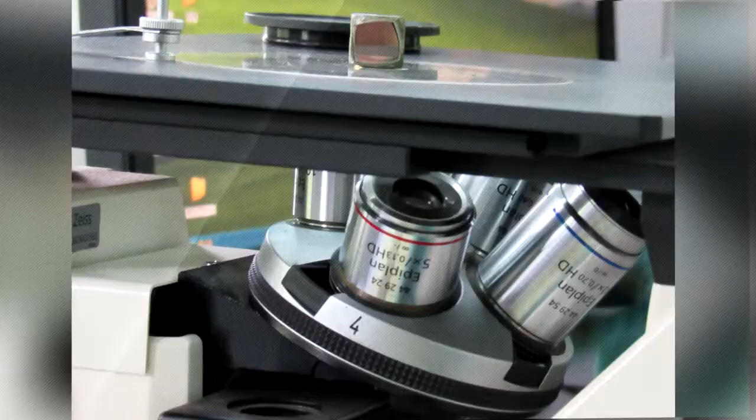Shengji, with its well-equipped R&D centers and national-level laboratories, carries out strategic cooperation with multiple universities and research institutes of Sinopec.

Shengji has 152 national patents granted and holds many API monogram licenses and ISO certifications.

Additionally, various other honorary titles such as National Key High-Tech Enterprise, AAA Grade Credit Enterprise, Contract Abiding and Trustworthy Enterprise have been awarded. Shengji products and services cover 7 sections.

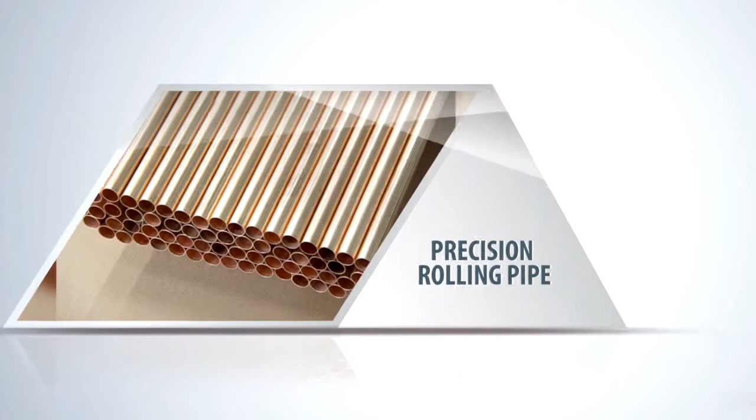Section 1, Conventional Drilling and Recovery Equipment, includes tubing and casing, precision rolling pipe, pumping units, downhole pumps, wellhead and Christmas tree, blowout preventers, pressure vessels, and oil recovery tools.

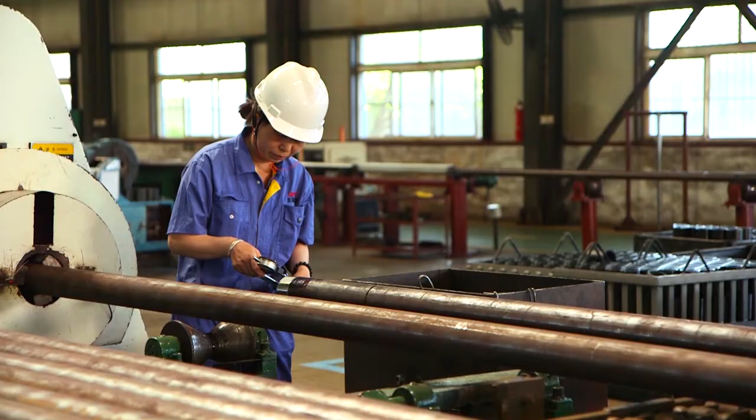Shengji has 25 years' experience in tubing and casing manufacturing. In 2009, China's first tubing upset production line was set up in Shengji.

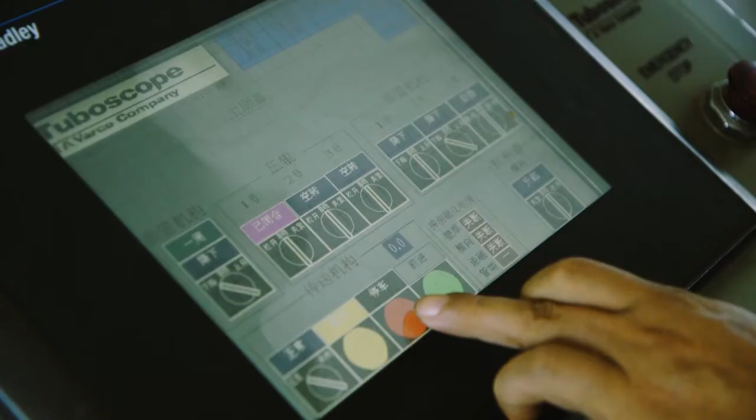With premium connection and advanced inspection and testing equipment, SJ brand OCTG enjoys high popularity among the end users around the world. The annual output is 100,000 tons.

In 2013, Shengji set up the precision rolling production line and developed precision rolling technology for Admiralty brass, P9, and Super 13 chrome tubes, which holds the lead in China.

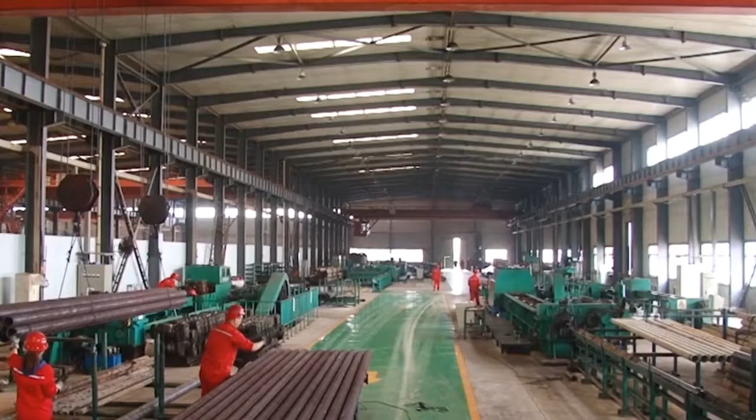With its straightness error less than 0.1 millimeters and wall thickness deviation less than 0.35 millimeters, the subsequent honing time is greatly reduced. The annual output is 10,000 tons.

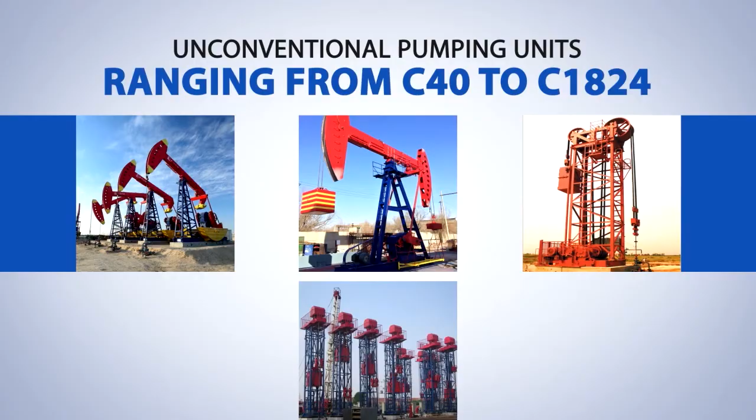Shengji produces a wide series of API 11E pumping units and unconventional pumping units ranging from C40 to C1824. Automatic blanking and robot welding were adopted to achieve high accuracy and efficiency of manufacturing the pump unit structures.

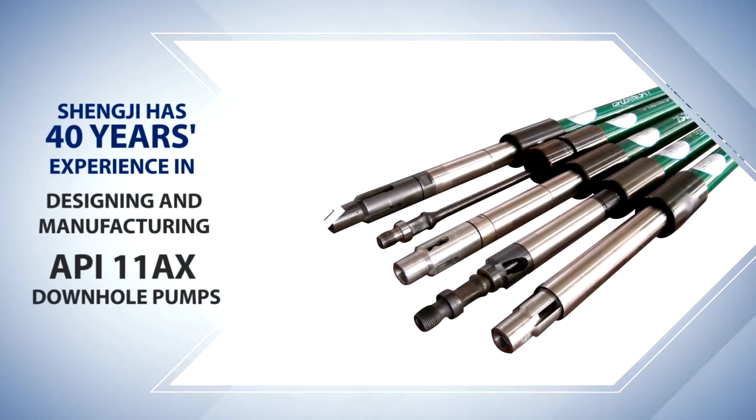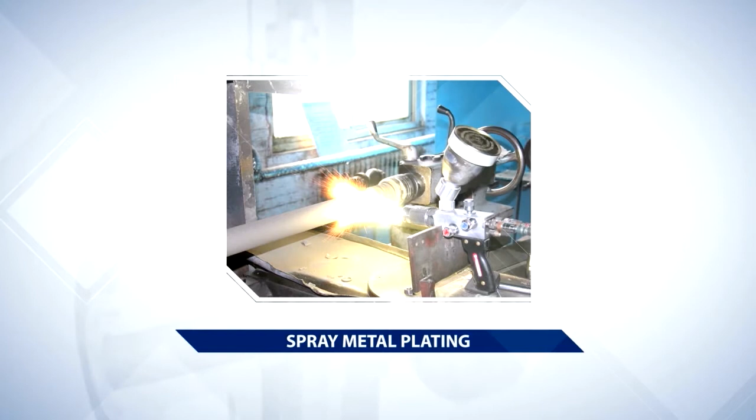Shengji has 40 years' experience in designing and manufacturing API 11AX downhole pumps. We participated in the development of the national standard, a variety of special processes such as spray metal plating, boronizing,

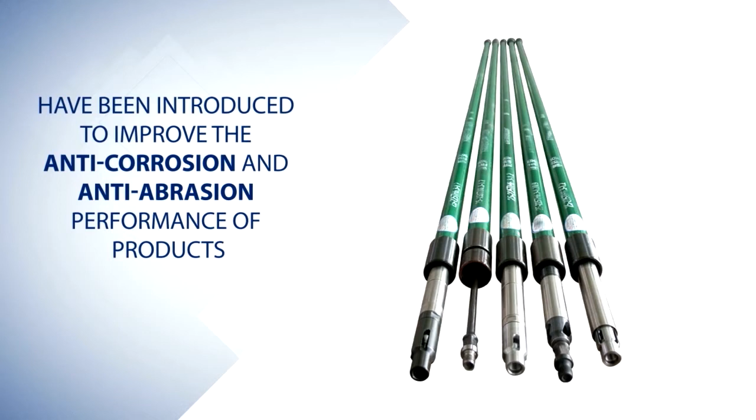nitriding, nickel carbide composite coating, and chrome plating have been introduced to improve the anti-corrosion and anti-abrasion performance of products. Shengji is the only Chinese manufacturer of brass pumps in batches. The maximum pump diameter is 6 inches.

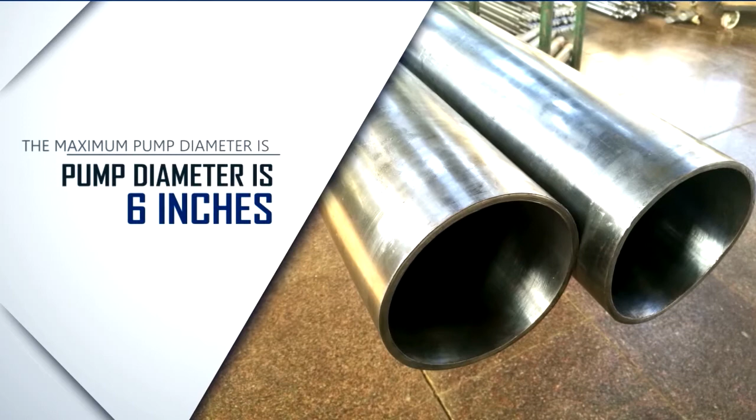With more than 40 years' experience in designing and manufacturing wellhead and Christmas trees, Shengji has obtained PR2 certificates for gate valve, choke valve, tubing head, and casing head.

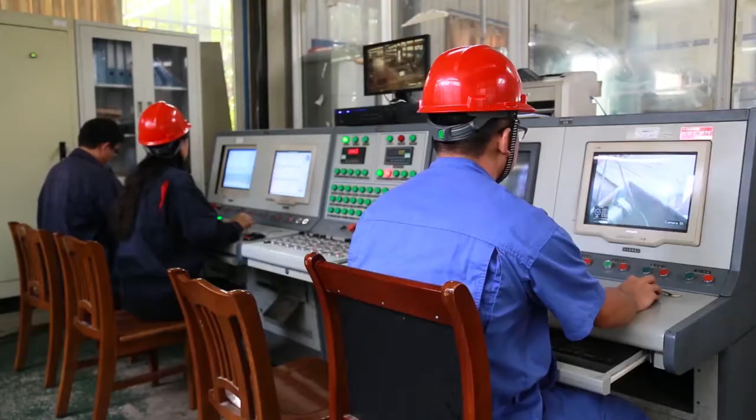Shengji is a designated well control experimental base of Sinopec and undertakes all kinds of hydraulic pressure and airproof tests. The maximum pressure is 35,000 psi.

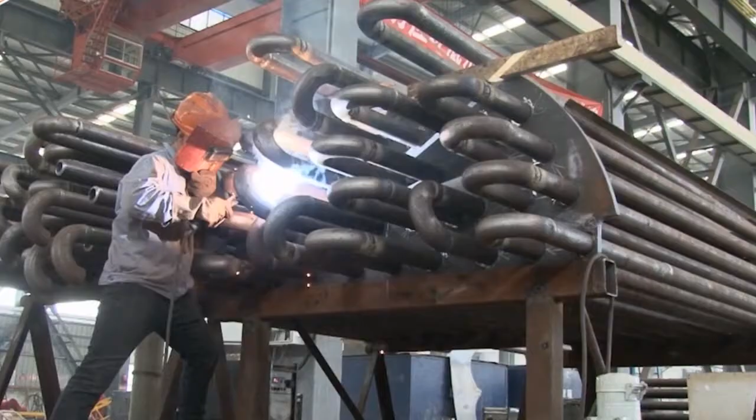Shengji specializes in designing and fabricating National Class 1, 2, and 3 and ASME pressure vessels. Main products cover storage tanks, separator, and heating furnaces. The products have been widely used home and abroad and are highly acclaimed by the clients.

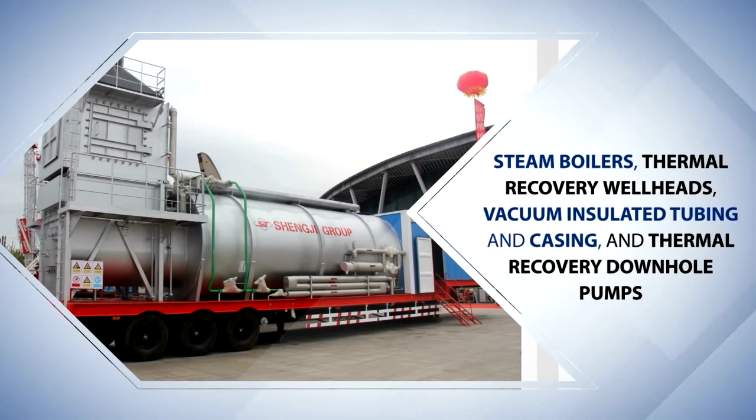Section 2. Complete sets of thermal recovery solutions, including steam boilers, thermal recovery wellheads, vacuum-insulated tubing and casing, and thermal recovery downhole pumps.

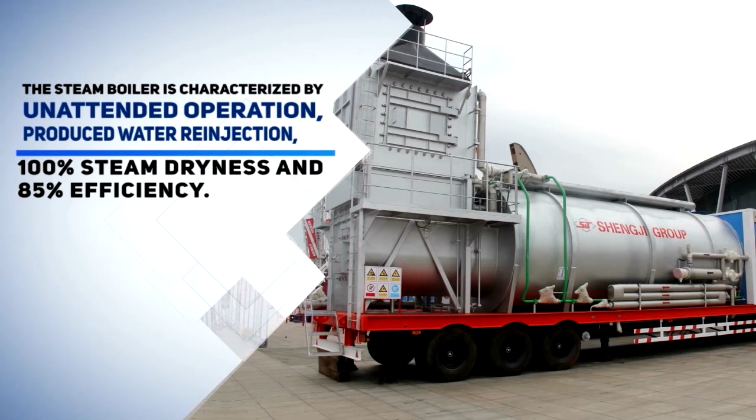The steam boiler is characterized by unattended operation, produced water re-injection, 100% steam dryness, and 85% efficiency. The market share in Shengli oil field is 100% and have been successfully exported to Sudan and Albania.

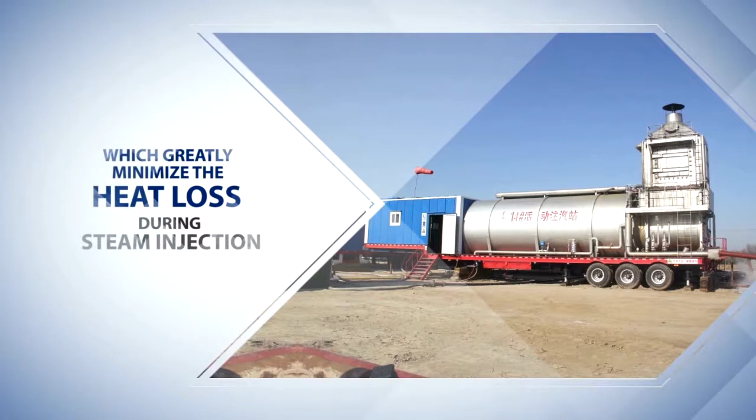VIT and VIC use dual-layer insulation couplings, self-righting donuts, and aerogel blankets, which greatly minimize the heat loss during steam injection. The series of thermal recovery wellheads and sucker rod pumps can realize the integrated operation of steam injection and

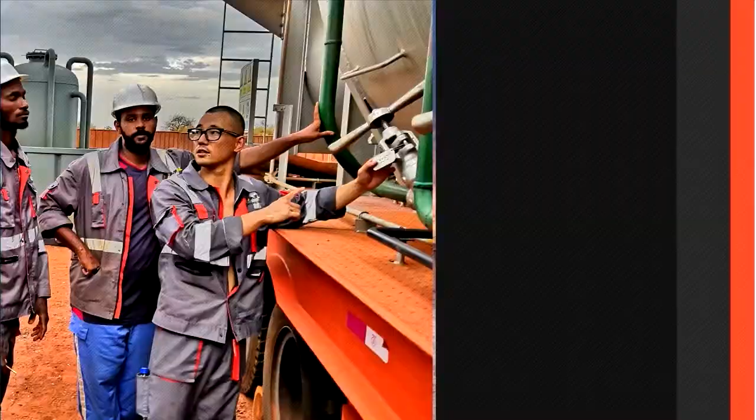oil recovery. Shengji provides customers with a clean, efficient, one-stop thermal solution.

Section 3. Anti-corrosion and anti-abrasion solutions.

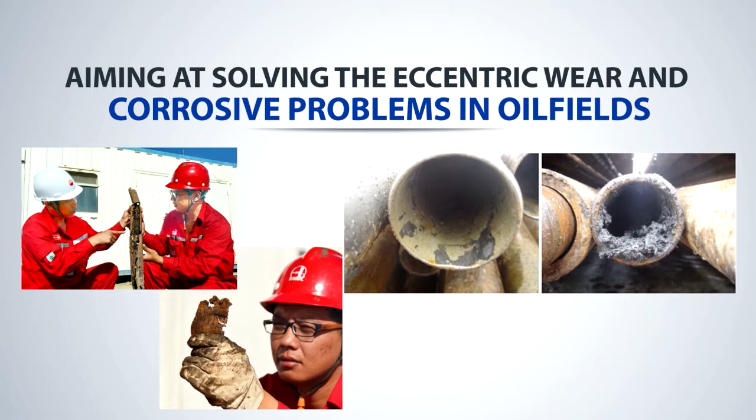Aiming at solving the eccentric wear and corrosive problems in oil fields, Shengji rolled out diversified anti-corrosion and anti-abrasion products:

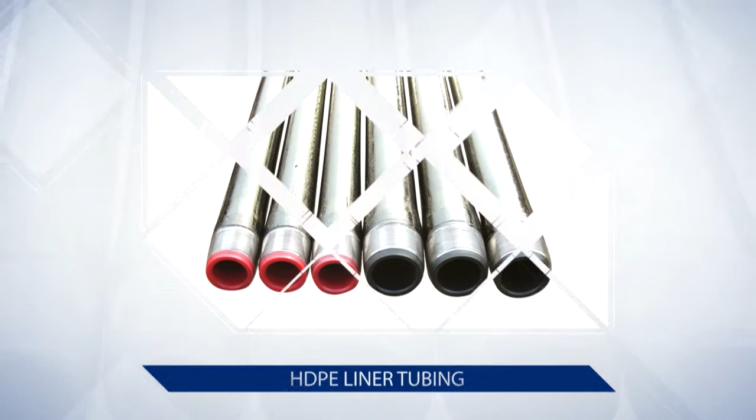HDPE liner tubing, epoxy-coated tubing, composite-plated tubing, coated sucker rods, anti-corrosion downhole pump, and anti-H2S wellhead.

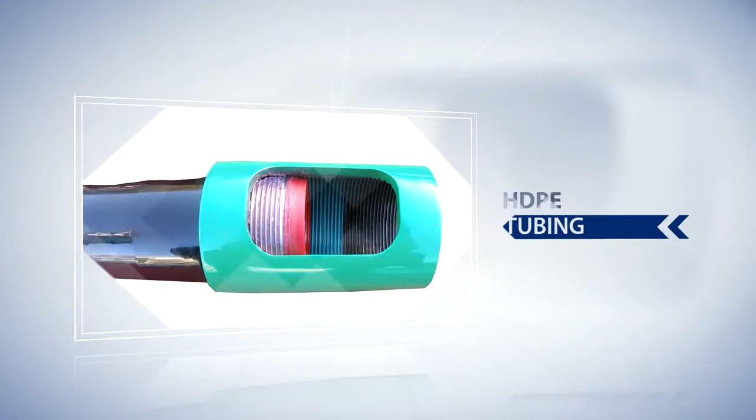For instance, the composite-plated tubing and HDPE tubing have high corrosion and wear resistance, which can effectively solve the problems of eccentric wear, perforation, and scaling. The repair free time has been extended by 5 to 10 times.

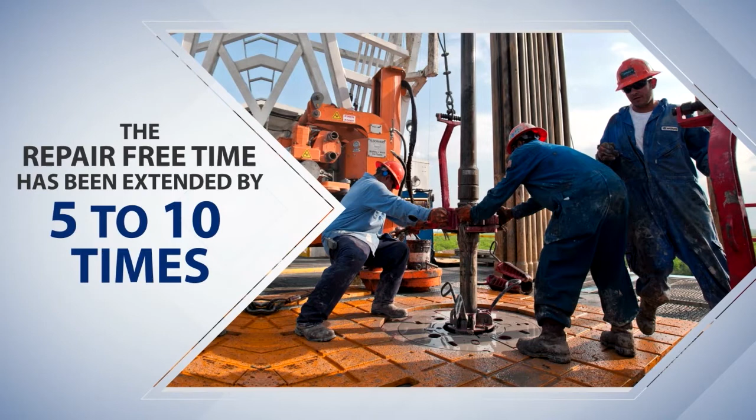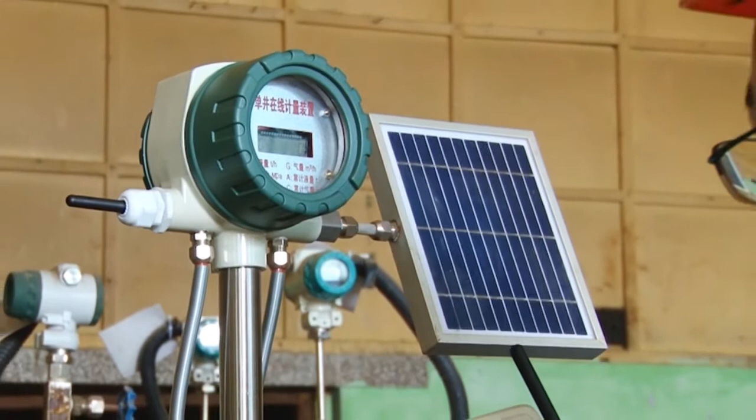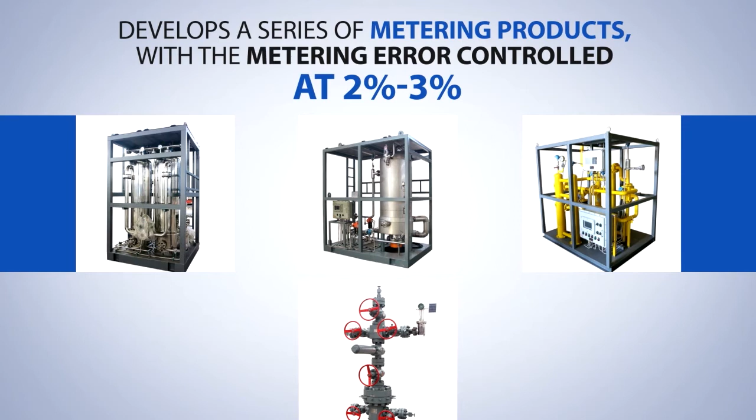Section 4. Multi-phase metering solutions. Shengji provides customized metering solutions for complex field conditions such as heavy oil, high gas content oil, foamy oil, and serious slug flow oil, and develops a series of metering products with the metering error controlled at 2 to 3%.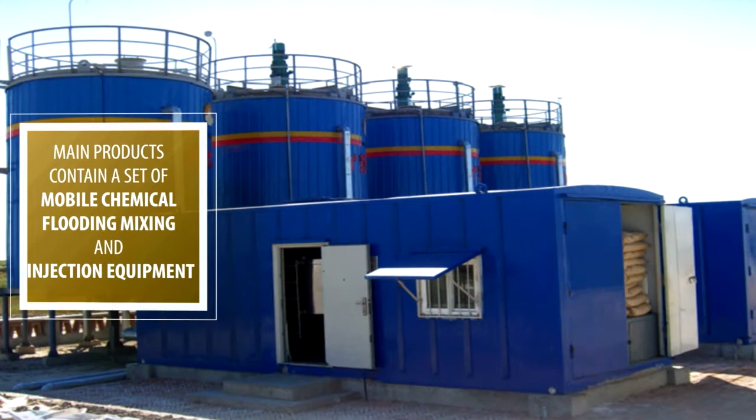Shengji has the only national multi-phase flow laboratory of Sinopec. Section 5. Tertiary recovery equipment. Main products contain a set of mobile chemical flooding, mixing, and injection equipment, a set of microbial displacement and injection equipment, offshore polymer device, etc.

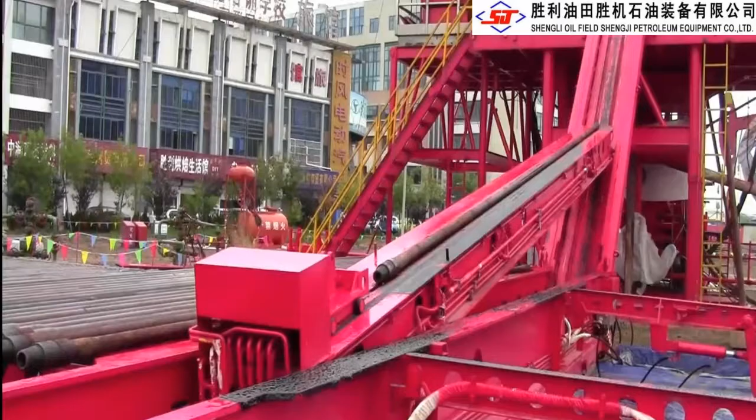Section 6. Intelligent manufacturing. Shengji has launched a series of high-intelligence products. Typically, an intelligent workover rig adopts advanced robot closed-loop control, fault early warning, remote monitoring, and one-key operation, which saves manpower and enhances safety.

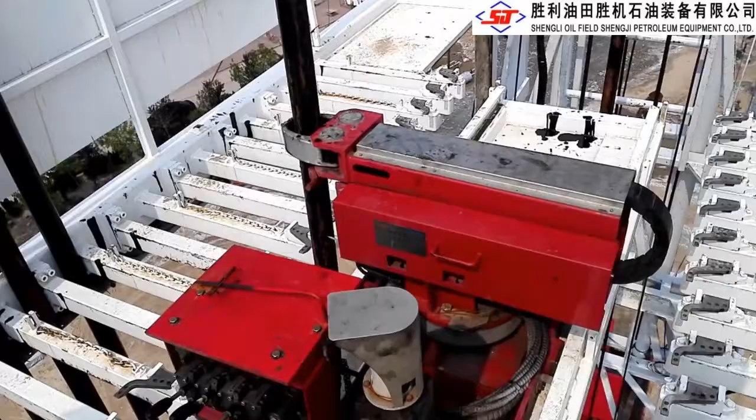Section 7. Engineering services. Shengji can independently contract production line design and installation, offshore drilling platform maintenance, steam injection service, well metering service, and so on.

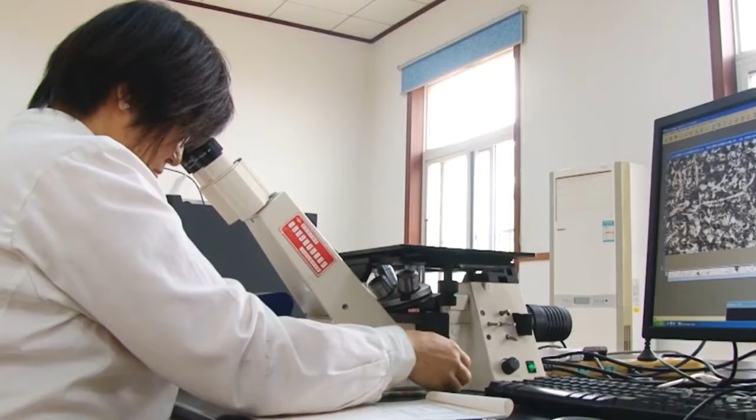Adhering to quality first, customer supreme, Shengji Group stresses the construction of the quality system and laboratories.

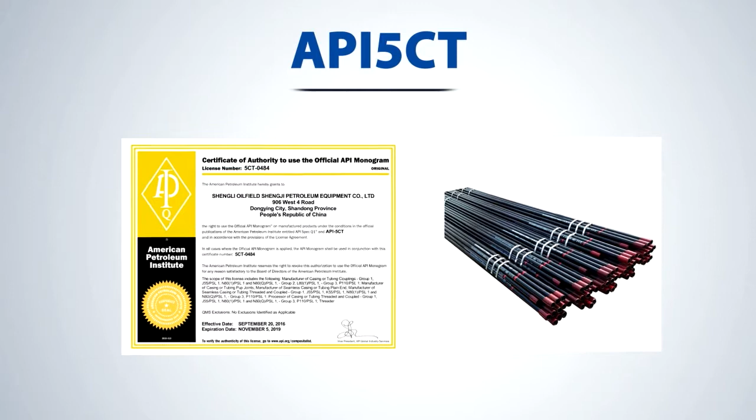Since 1996, Shengji has successfully obtained certification of ISO 9001, HSE, API 5CT, 11AX, 11E, 6A, 16A, ASME US, CE.

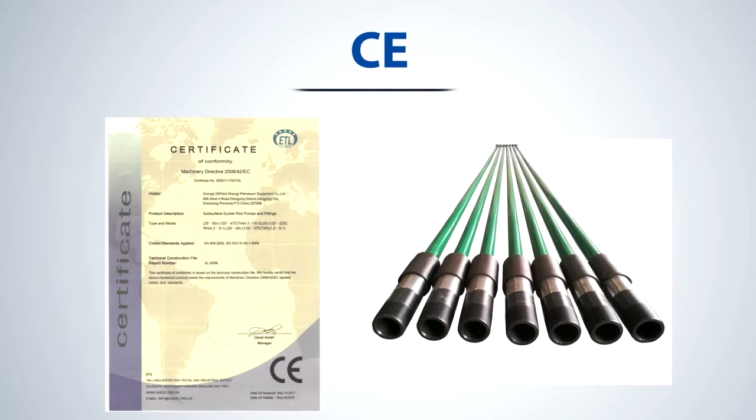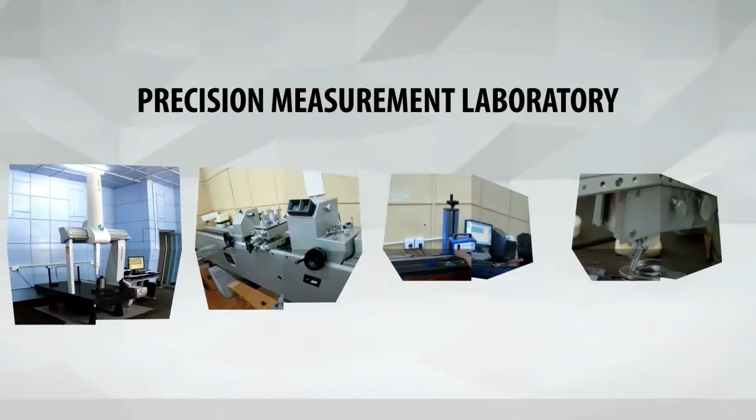Shengji has established 4 national basic laboratories: Physical Laboratory, Chemical Laboratory, Precision Measurement Laboratory, and Thermal Instrumentation Laboratory.

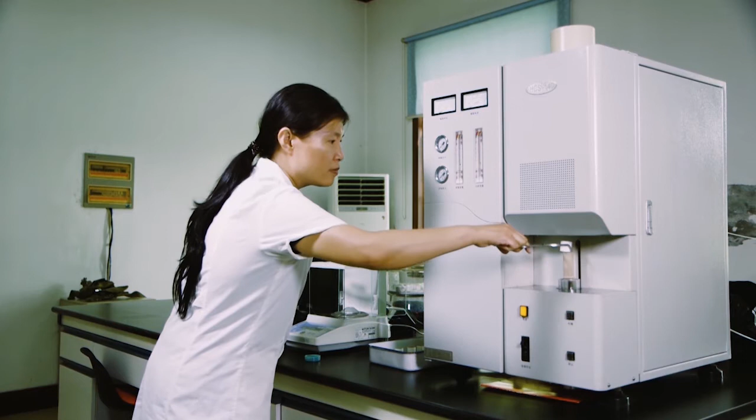Additionally, advanced inspection and testing equipment guarantee the product's quality is leading level. Shengji designs a series of solutions to different problems occurring in oil field productions. Typical solutions include artificial lift solutions for coal bed methane drainage.

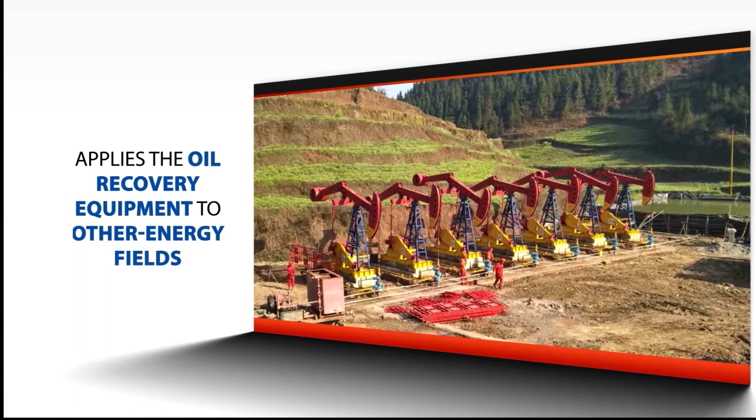Apart from oil and gas recovery, Shengji also successfully applies the oil recovery equipment to other energy fields. We undertook the drainage process design, product selection, and complete sets of coal bed methane mining projects in Guizhou and

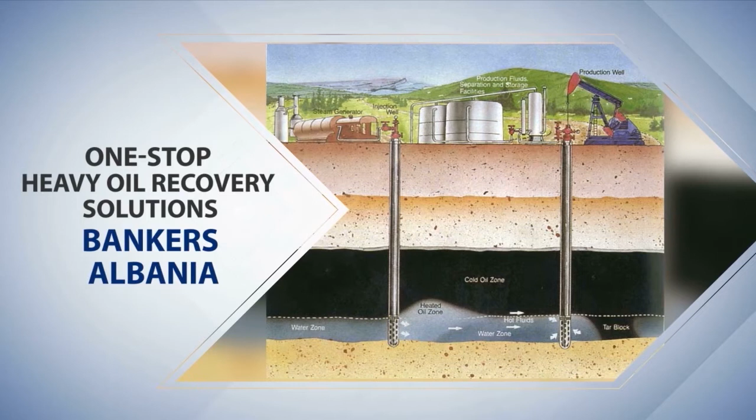Xinjiang Province, China. Thermal recovery solutions for Bankers oil field. Shengji provides one-stop heavy oil recovery solutions for Bankers oil field in Albania, including steam injection boilers, water treatment devices,

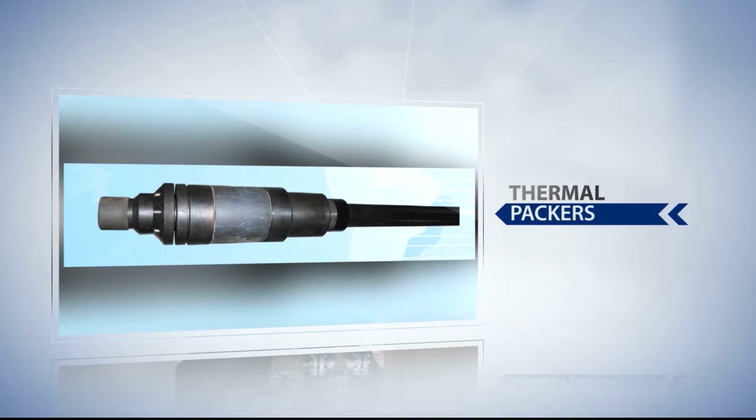pumping units, thermal wellhead, VIT and VIC, injection and recovery pumps, thermal packers. The oil recovery efficiency has been greatly enhanced.

Anti-corrosion and anti-abrasion solutions for Bahrain. Shengji solved the problem of tubing corrosion in high CO2 and H2S wells with HDPE liner tubing in Bahrain. The repair-free time has been extended by 5 to 10 times.

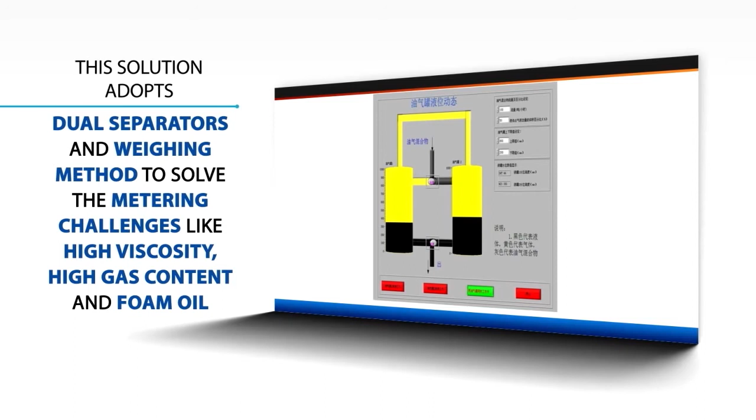Multi-phase flow meter solutions for MPE3 oil field in Venezuela. This solution adopts dual separators and weighing method to solve the metering challenges like high viscosity, high gas content, and foam oil.

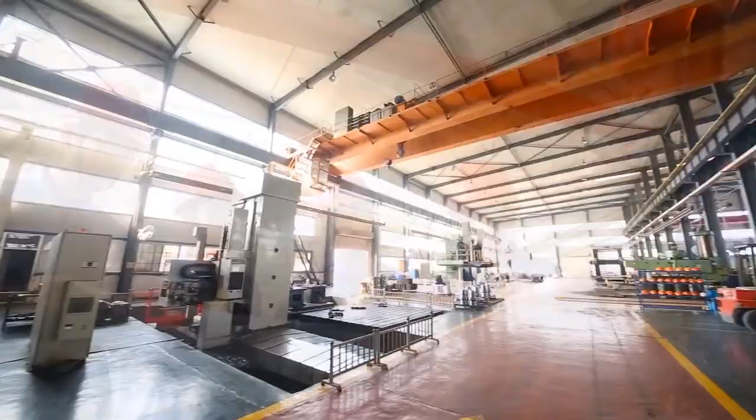Responsible to the customers, responsible to the shareholders, responsible to the society.

Shengji has been committed to comprehensive oil and gas solutions for more than 50 years. 11 subsidiaries and several offices have been set up home and abroad.

The products have been exported to more than 60 countries, and Shengji has built up partnerships with a number of world-class companies such as Sinopec, CNPC, CNOOC, Shell, Oxy, Chevron, GE, Schlumberger, Halliburton, NOV, Weatherford, and more.

Let's come together and work for a shared future.